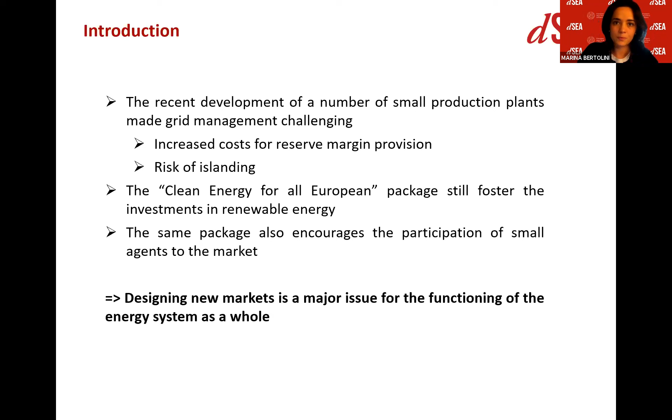The Clean Energy for All Europeans package still fosters investment in renewable energy. So it is clear that we need to find a way to integrate new small agents in the market, and designing new markets is a major issue for the functioning of the whole energy system. When we speak about new agents, we speak about prosumers, of course, but also small power plants, and now also aggregators. Aggregators are a reality now in some European countries, for example, in Germany. There is not much regulation dedicated to aggregators by now, and the market functioning will be highly affected by these new agents.

Also, existing agents shall be reconsidered and re-regulated. In particular, DSOs, distribution system operators, are the central point in the new regulation, as they have a key position in the network, as they manage the distribution. They are unbundled now from other activities, of course, but maybe we need to call them back in some part of the market. This is still an open point, highly discussed in the literature.

So it is necessary to study possible ways in which variable distributed energy sources can participate in the new markets, taking into account technical issues together with economic issues. This is our first interdisciplinary attempt. We approach the design of new electricity markets together with our colleagues from the Industrial Engineering Department, considering both economic and technical implications of the two alternatives we are studying. We investigate the impacts of the two different market designs on the social cost of the balancing service. We provide a model for calculating the overall social cost of balancing services, and try to define the cost in the two different scenarios.

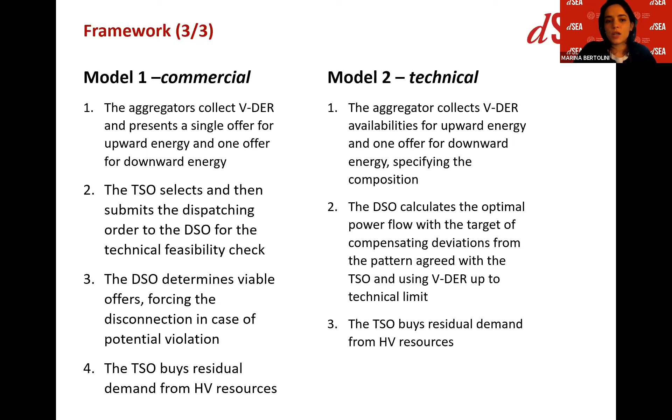In the second model, the aggregator collects the availabilities for upward and downward services, but in this case, it specifies the composition of the offers to the DSO, and the DSO, who knows the network, can calculate the optimal power flows, also considering its constraints. The DSO has the target of compensating deviations from an agreed pattern, which it has a duty to keep at the contact point with the transmission network. Then again, the TSO buys residual demand from the transmission network in case the distribution network is not sufficient to cope with the balancing need.

So this is the process. I already told you most of this, but we can see there is the balancing need, which is the difference between the expected energy exchange and the realized energy exchange. We have the upward offers, identified with the plus, and the downward offers, the minus. In case of risk, the DSO can disconnect all the V-DERs, and in this case you have curtailment costs because you have more balancing needs. If the DSO is forced to cut all the local production, you add more need for balancing because you don't have the production from renewables at local level, and the TSO needs to buy more from the high voltage resources.

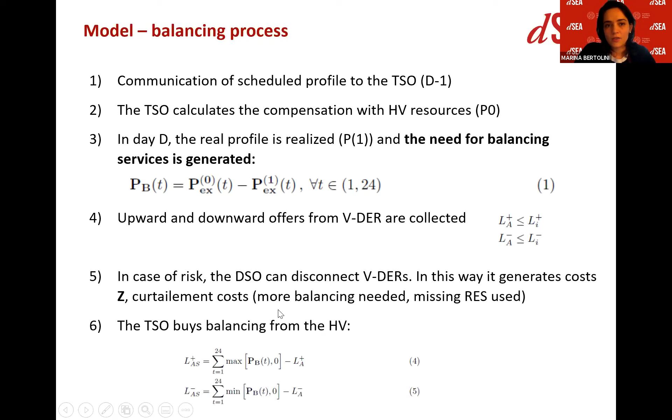The overall cost of balancing is represented by this equation. The total cost is: P star plus and minus, the prices for balancing from high voltage resources, multiplied by the expected energy need bought from the transmission grid, plus the price paid at local level for balancing. PA plus and PA minus are the prices respectively for upward and downward services provided at local level, plus PZ. That can be seen as a consequence of a wrongly incentivized V-DER, as it represents technical constraints that do not allow for the use of distributed energy sources when needed. We will come back to this later.

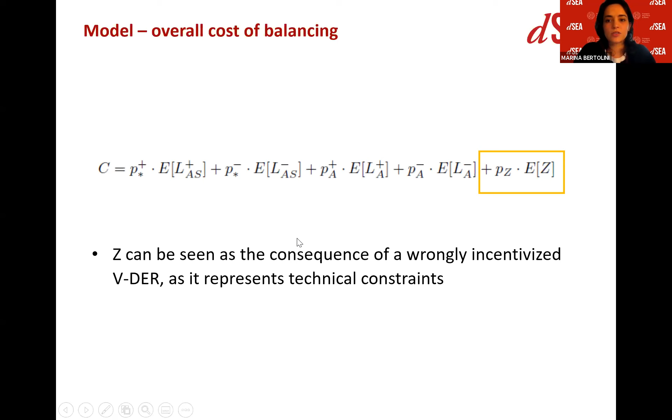We use the two assumptions for residential, commercial, and industrial loads. We use these patterns in figure A. And here you can see the typical consumption pattern for different types of consumption. So, for example, the residential one is higher in the evening. Industrial is always present, but there is more consumption in the central part of the day, and so on.

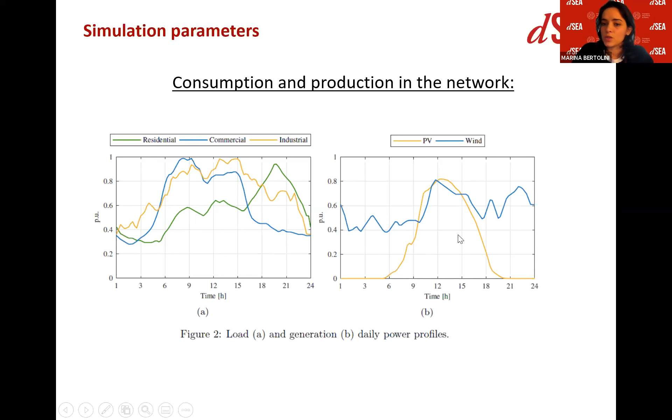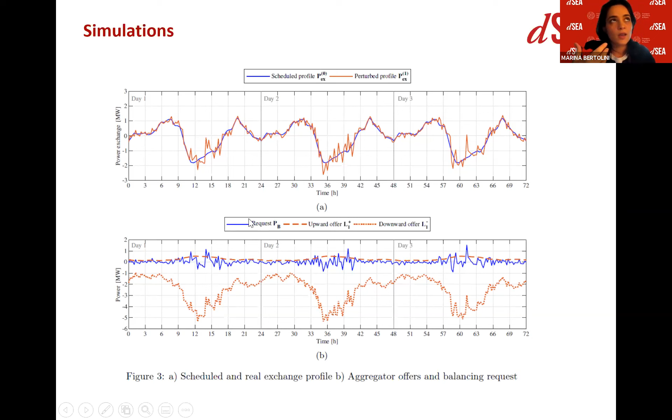And also, please note that we are not considering the presence of batteries for now. This simply will make both photovoltaic and wind more predictable and, let's say, enable the agents to play more on the markets. This is an extension that makes the system work better.

Marina, you have 2 minutes to conclude. Okay, so I go quite fast now. I'm sorry for the length.

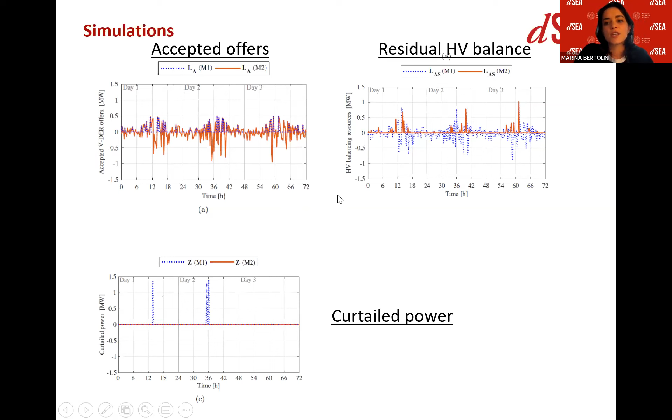So here we have the accepted offers and the residual balance that needs to be bought in the high voltage services. And here we can see the curtailment. These 2 peaks represent the points where the network fails and you cannot use your renewables because the network is not supporting the services. So here I will need to skip these. These are the energy flows in the different cases.

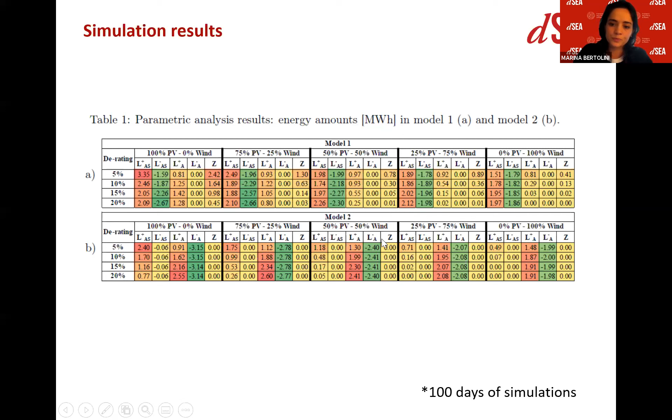Please note that we made some simulations with the derating. As I told you, we were initially assuming 10% of the rating to participate in other markets, but my colleagues also did some simulations from 5 to 20%. And then here we also change the generation mix from 100% photovoltaics to 100% wind, with many differences here between model 1 and model 2.

Downward service: increasing the derating percentage leads to higher need for balancing in all scenarios. Higher the derating, lower the probability of congestion, and upward services are highly dependent on generation mix and ratings, also because photovoltaics are correlated and wind here is not correlated.

In market model 2, what is relevant is that Z is always equal to 0 because the DSO is forced, incentivized, to use its resources at the local level. The DER can decrease the entire production in case of 100% photovoltaic. Of course, this is not true during the interval in which photovoltaic is not producing.

As we remove the indivisibility constraint of offers, we can use more offers from the local network because the DSO can decide to use only feasible offers, while in the first model, which is a commercial one, you need to take all the offers if you want to balance from the distribution.

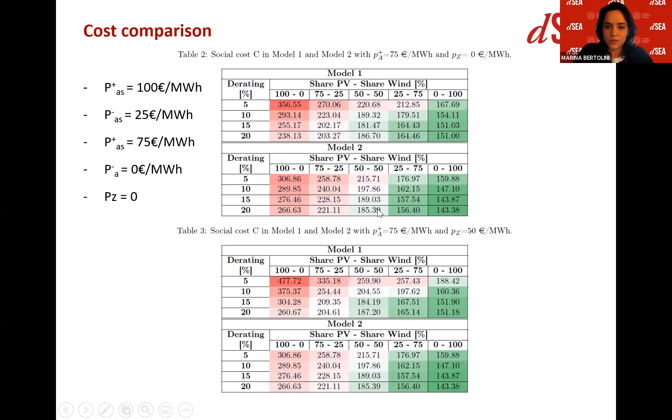Conclusions: a lot of curtailments in model 1 represent the missing integration of VDER in the system, and this is one of the most important points we want to focus on, because if you neglect to consider technical constraints, you will force the network to pay more for these local productions.

Model 1 leaves DSOs outside the balancing market. Model 2, on the contrary, asks them to be responsible for the integration of renewables at the local level. And I think that this is an interesting point also for future developments. Model 2, as I told you, is not always preferred because, of course, these local resources sometimes are more costly than the high voltage resources. So we have a trade-off between promoting renewables at local level and paying more for energy.

Overall, commercial aggregation is preferable when the penalty price of curtailment is low, and this is a policy parameter. And technical aggregation is preferable if the share of wind is higher, lower level of the derating capacity, or with high explicit penalties for curtailments. And again, these penalties are something we have to decide at policy level.

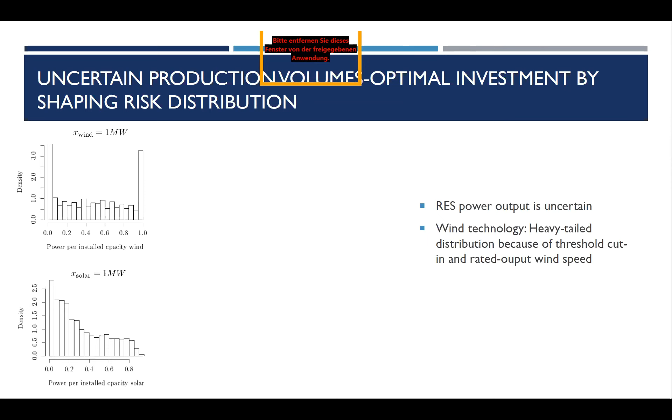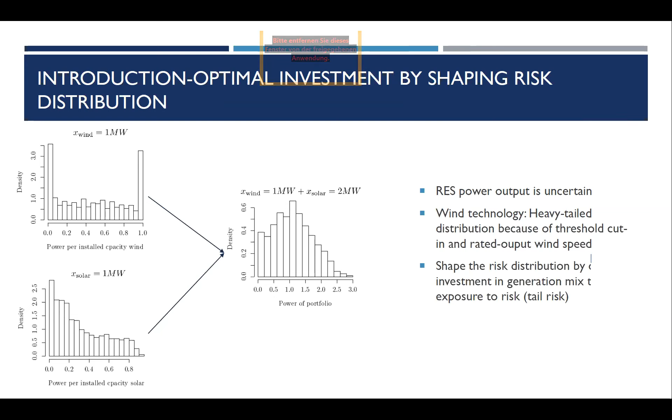So since each technology is associated with this kind of specific power output distribution, the energy manager can look for a diversified portfolio, a mix of generation technologies, in order to reduce the exposure to risk. In this histogram, an energy portfolio consisting of 1 megawatt of wind power and 1 megawatt of solar power installed is illustrated to show the effect of risk shaping by choosing a diversified technology mix. So by optimally choosing the installed capacities, the energy manager is able to avoid specific risks, for example, tail risks introduced by wind technology.

So with the underlying primitive that the energy manager can shape the risk distribution by choosing the renewable energy portfolio, the question arises what the optimal technology portfolio is. Therefore, we consider a prosumer who minimizes the total costs of power procurement. The underlying constraint is that the firm's electricity demand can be covered, either by self-generation facilities or by making use of an outside option and purchasing external power.

So given a renewable energy portfolio denoted by a small x, where the components represent the capacities installed in a certain technology, the associated difference of demand and supply is denoted by capital X, and depends on the chosen portfolio. Based on the choice of portfolio, both the shortfall power and the surplus power can be expressed in terms of the maximum function of this difference of demand and supply.

Moreover, weighting the shortfall power and the surplus power with the respective prices, the shortfall power with the energy price and the surplus power with the level of the feed-in tariff, gives the capitalized losses or gains associated with the renewable energy portfolio over the expected useful lifetime of the energy park, denoted by delta T.

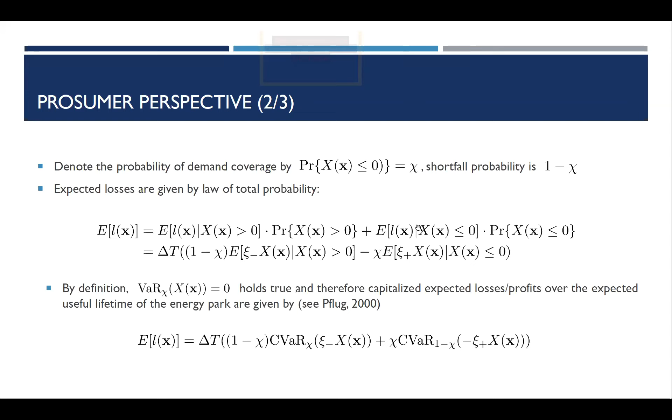So by applying the law of total probability, the cases of shortfall power and surplus power can be distinguished, and we observe that the expected capitalized losses or gains are given by the conditional value at risk metric. So in total, the prosumer aims at minimizing the total costs, which consist of the investment costs and the capitalized losses or gains, subject to a budget constraint which limits the initial investment.

Based on this optimization problem under uncertainty, we determine the optimal level of investment in renewable energy technologies from the energy manager's perspective, analyze the effect of different energy prices and different levels of the feed-in tariff, which are denoted here by Xi minus and Xi plus, and illustrate the effect of the different prices on the optimal portfolio selection.

So we evaluate this model in a use case where we consider an energy manager who aims at minimizing these total costs such that the hourly demand can be covered and the budget constraint is specified to 1 million euros. So we consider only 2 renewable energy technologies in the use case, which are wind and solar power. And note that in this use case, we only consider a daytime model where the opportunity to invest in solar technology is valuable, since in the nighttime, no solar power is available.

So the prices of the investment goods are specified in terms of the costs per installed capacity of wind and solar technology, and are given by 1,400 euros per installed capacity of wind and 1,000 euro per installed capacity of solar power. And the range of the energy price and the level of the feed-in tariff that we consider ranges from 0 to 100 euro per megawatt hour.

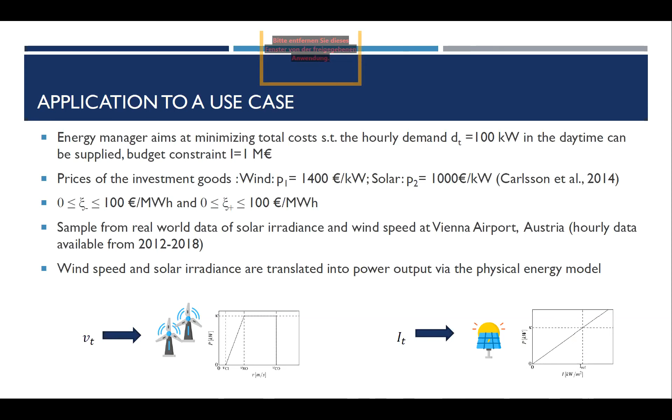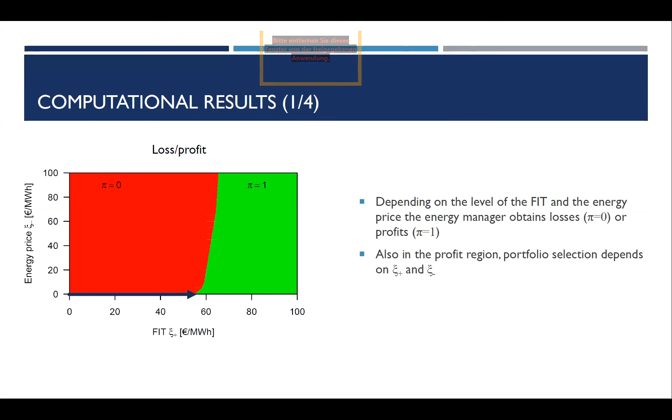So even in case the energy manager observes losses, the total costs can of course also be decreased for investment in renewable energy technologies compared to the benchmark scenario of purchasing totally outside power. So also in case the total project refers to losses, investment in renewable energy portfolios can of course decrease the total costs. So we also observe that there is a threshold level of the feed-in tariff, such that even in case of a vanishing energy price, which means that energy comes for free, profits can be created, which is indicated by this point here.

So now let us discuss the investment behavior with respect to the probability of demand coverage. So the probability of demand coverage is the probability that the energy park alone can supply the demand and is therefore related to the level of energy autarky. So in the investment model, the probability of demand coverage is an endogenous parameter which depends on the external costs, which are the energy price and the level of the feed-in tariff.

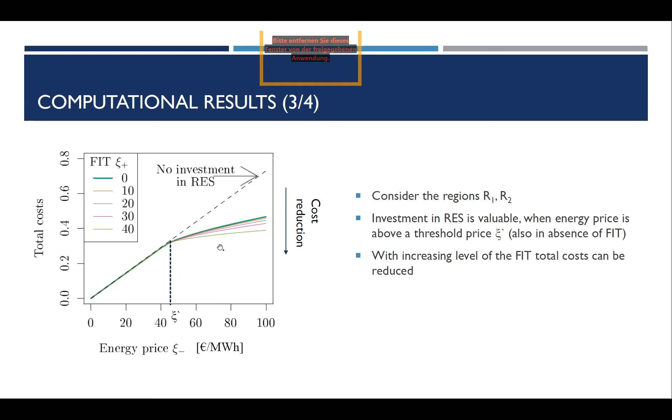So we already observed there exists this threshold energy price denoted by Xi prime, where investment in renewable energy technologies is valuable. So we observe that above this threshold price, the total costs can be decreased compared to the benchmark scenario by investing in renewable energy technologies. So indeed, we observe that the feed-in tariff is effective in this region because it reduces the total costs with increasing feed-in tariff.

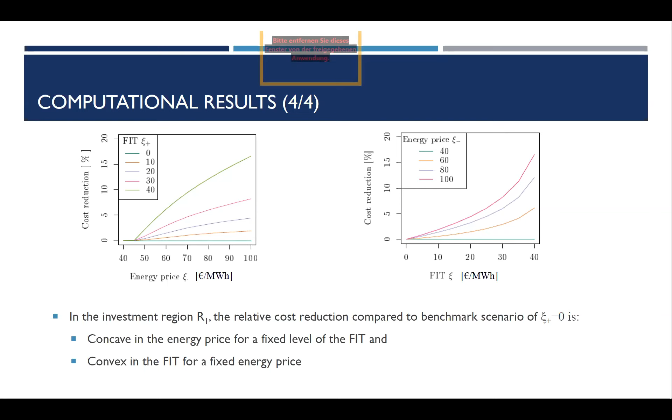To sum up, we analyzed the energy manager's investment decision from a prosumer's point of view in renewable energy technologies in the presence of uncertain production volumes and a remuneration policy of a fixed and market-independent feed-in tariff. We show that the underlying optimization problem can be reformulated in terms of the conditional value at risk and demonstrate the model in a use case where the energy manager has the opportunity to invest in both wind and solar technology. So the optimization problem is solved by a data-driven optimization approach, which uses real-world output data.

So we identified the regions depending on the level of the feed-in tariff and the energy price, where the energy manager refuses investment in renewable energy technologies, and the region where the remuneration scheme works properly. And this means that the energy manager increases the probability of demand coverage with increasing levels of the feed-in tariff. So then we also discussed the presence of overcompensation, where the energy manager's optimal decision is to decrease the probability to cover their own demand via self-generation facilities, and therefore invests in inefficient renewable energy portfolios that promote overcompensation. So thank you for your attention, and now I'm open for questions.

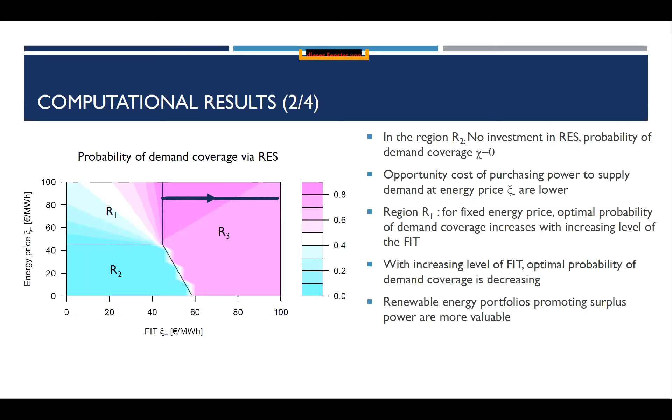So that means, yeah, exactly. So we can implement in this way what you mentioned, that with increasing investment the energy price is decreasing, for example, and via these correlations we could implement this effect and analyze it on the optimal investment decision. Yeah, thank you for this point.

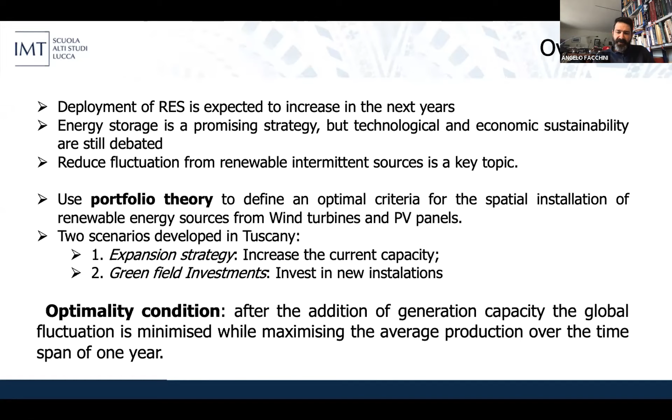The first strategy is to consider the current capacity in a certain region and to expand one or more stations in this generation portfolio, or to invest in new installations. So the idea is to invest in both strategies by considering an optimality condition for which the objective is to minimize the fluctuations that new renewable plants or the addition of new generation capacity introduce, while maximizing the average production over the time span of 1 year.

So what we are basically doing is to start from the theoretical approach, in which we consider a set of Gaussian sources. We mathematically define an optimal frontier for feasible portfolios, and with some analytical and experimental data, we showed that the optimal boundary can be pushed up by increasing the presence of anti-correlated sources in the portfolio.

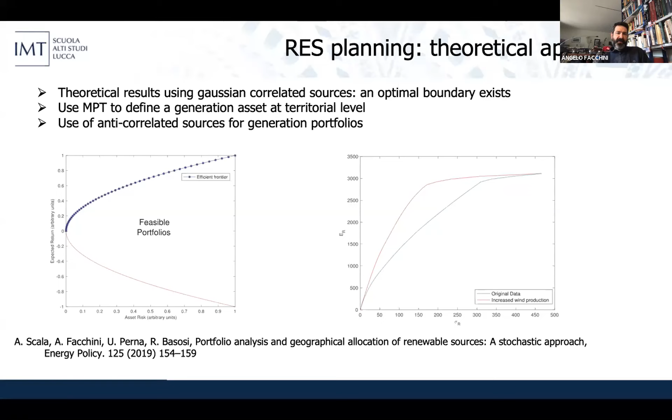So the idea is to analyze the correlation of all the weather stations and power stations present in Tuscany in order to show how and if the wind and solar sources are correlated. So the first step is to study the correlation of all these sources. And the second step is, considering accurate models of photovoltaic panels and wind turbines, we projected a generation profile according to the data of the weather stations. So the first step is the correlation analysis of all the stations, filtering out missing data or generators with non-suitable size.

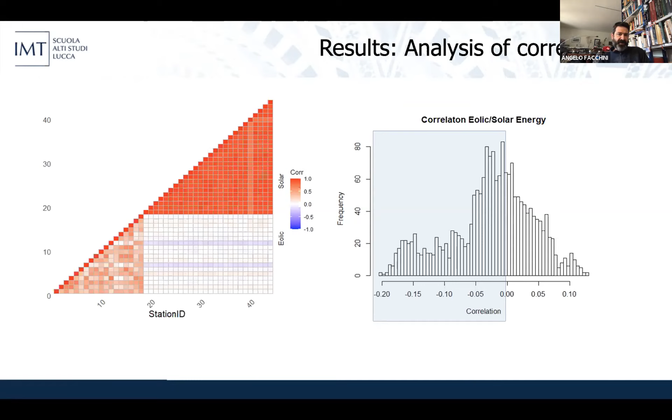So this suggested us to use some constraint and to make some further analysis regarding the correlation profile hourly. Since we are interested in the yearly performance of the system, we decided to also investigate the profile of the correlation during the daytime, in order to disentangle the contribution from wind from the contribution of solar, expecting a shift of the histogram of correlation towards positive values because of the increased photovoltaic generation.

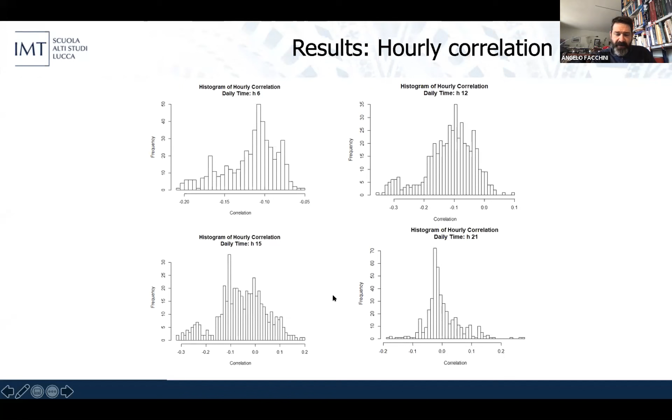So what we did in order to analyze the two investment scenarios, both the expansion strategy and the greenfield strategy, is an approach based on picking up each single station present in our generation portfolio. We discarded the actual values of the capacity of the power plants, and we decided to consider a standard generation capacity for both wind and solar stations. This is because we were interested in isolating only the effect of fluctuations due to the intermittency of the sources.

And so in the expansion strategy, we considered a number of runs in which in each run we increase by 50% the nominal capacity of one existing station, both photovoltaic and wind. So we consider a portfolio, and in this portfolio we changed sequentially one single capacity of a station. This because we were interested to understand how the correlation profile and the generation profile of the whole portfolio change by moving only one station.